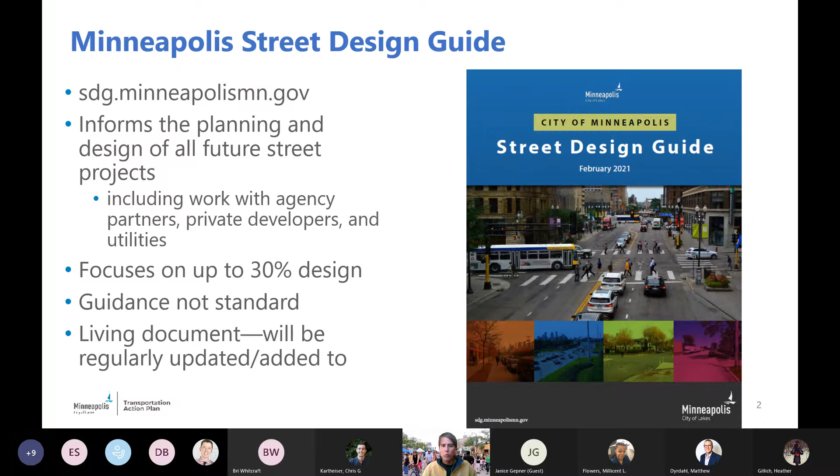I want to note, from a technical perspective, this is guidance. It's recommendations to help inform our internal technical work, but it's not standard in the same way that some other things we have to follow are standard or requirements. We will be updating this regularly going forward, and we'll be adding to it. We'll talk about this a little bit at the end as well.

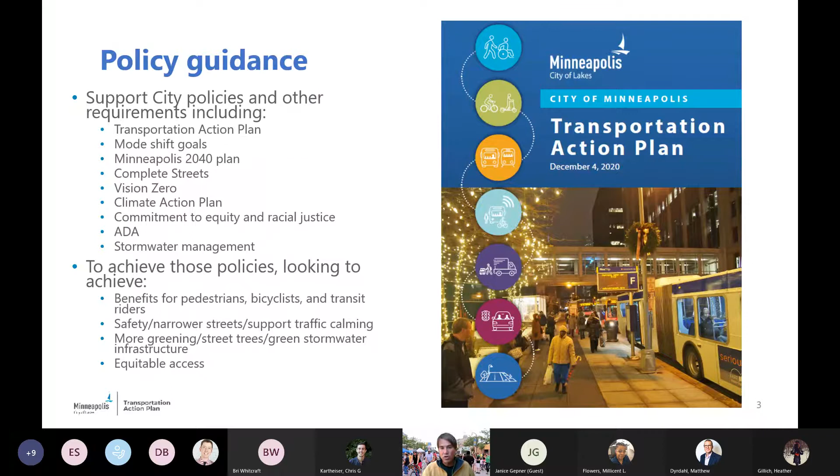This guide is really an implementation guide to help support adopted city policy. It comes out of the Transportation Action Plan directly, but a lot of other city policies help inform this. Overall, with the street design guide and these city policies, we're looking to achieve benefits for people walking, biking, and taking transit, which are clearly priorities for the city. Safety, narrower streets, traffic calming, other things related to our Vision Zero work, providing more space for greening, street trees and green stormwater infrastructure, and making sure we're providing equitable access across the city.

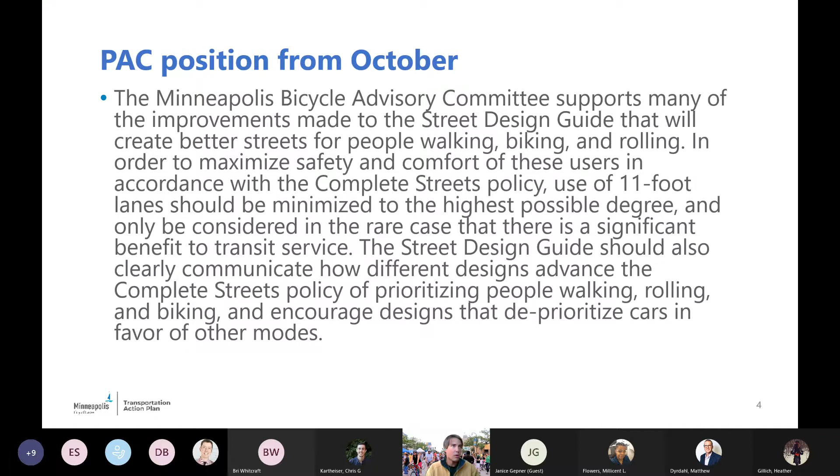So I'll try to touch on those things. We've definitely tried to reflect that within the guide, so I'll get to those details. Just wanted to reflect what you all said.

So I'm now going to stop sharing this, and I'm going to actually walk through a few things on the website itself before going through a few of the more recent changes. If you'd like, you can either just watch me, or if you prefer, you can log in yourself. Hopefully you're seeing this is not the right thing. Okay, all right, are you seeing the Street Design Guide website now? Okay, cool, so this is the homepage of the guide.

I do want to note, this is a very technical document. We tried to make this user-friendly as well, and it's really targeted for planners, engineers, or consultants, but also for members like yourself who are informing our process. So hopefully I can get you started in this, but it is quite technical.

For early users, I recommend this 'how to use the guide' starting point, which will give you some basic information about how the guide is structured, some of the things I already talked about, what its purpose is, and some places you can start. Within this, you'll see the guide is broken down into two sections. There's guidance around what we call different street types, so every street in the city is assigned a street type based on its context and functions, and from that we have guidance to help with thinking about it, especially if it were being reconstructed. We also have a lot more detailed guidance in different parts of the street, from sidewalks to intersections and different parts, and bikeways, of course. So that's the basic structure of the guide.

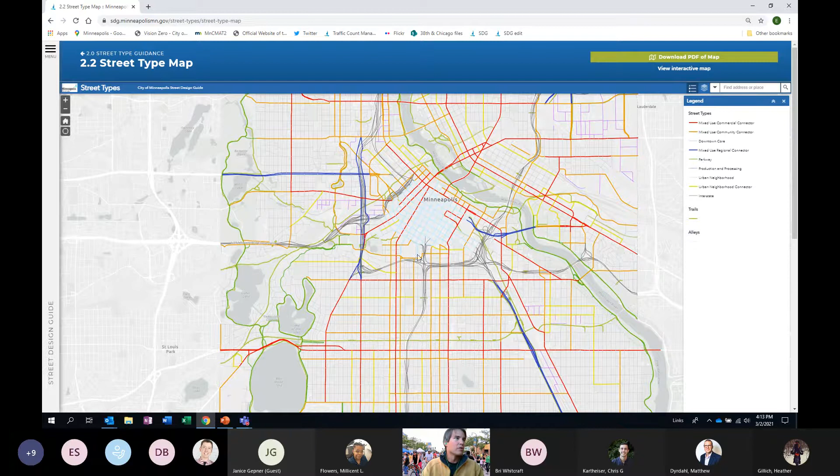And then the search feature, you can definitely search for different things. Just note that this is sort of, it's going to come up chronologically.

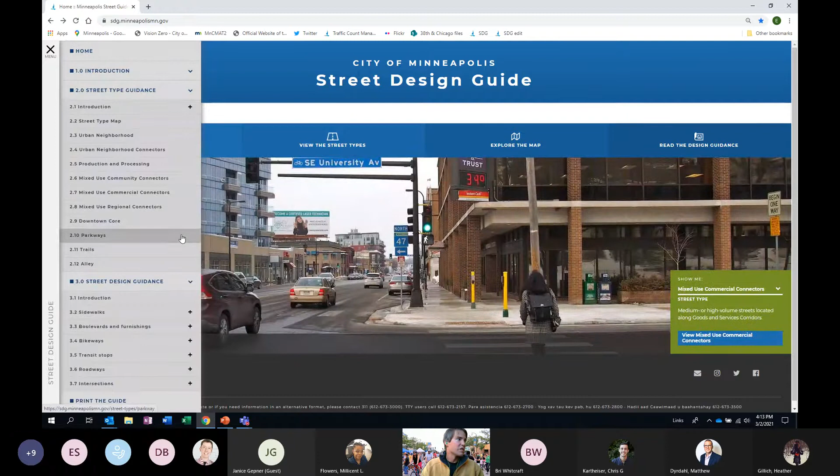So over in the menu here, you can see how different sections of the guide are broken down and kind of expand different things. You can see the bike within bikeways. We have a bunch of, you can just click on bikeways and go there, but you can also see that if you're looking for information about how do we do shared use paths or advisory bike lanes or something, you can find that in here.

And then in intersections as well. I'll dig in a little bit more on some of the bikeways details in a bit, but intersections, there's a lot here in bikeway intersection design as well. So lots to look into.

I just wanted to give you a basic introduction to the site. I'm going to actually go back to my presentation now and go through a few additional details.

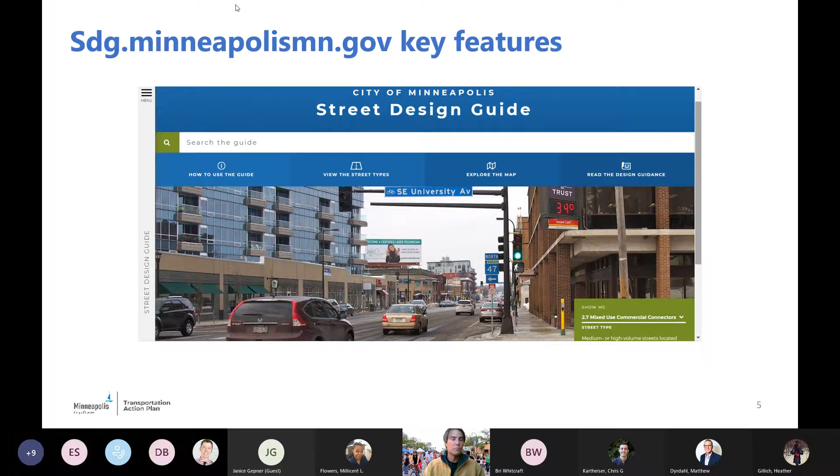Why my thing is beeping at me, a few additional details, okay, about some content highlights. I know I'm going through a lot of information. If you have a question, you can interrupt at any point, but they'll also have time at the end. So still trying to make sure I can see you in case you do something. Okay, there we go.

Okay, so some highlights. As I had talked about, some of these things are things that I shared when I presented previously in September, but I'm trying to provide additional details for you now that it's sort of finalized.

So part of the thing we're looking at within the guidance is to generally provide more flexibility so that we can maintain key city goals. One of the things we're going to talk about in a little bit, we know overall we're trying to support protected bike lanes. This is kind of a good example of how we're trying to provide more flexibility.

So at times we have not installed a protected bike lane because of some pinch points. And I think overall what we're saying with this guide, reflecting clear policy guidance and the transportation action plan, is that we need more flexibility to work out those challenging spots rather than just say, okay, we can't do a protected bike lane. And so you can kind of see how that ends up being reflected here in details.

So for example, this is a constrained cross section, and the way that we're kind of balancing that is providing flexibility to implement a two-way protected bike lane rather than just one lane in each direction. Providing flexibility in widths on the bikeway and the sidewalk, other elements, lane widths, even gutter pan widths. We're trying to maximize flexibility across the board.

Every different thing is given within the recognition of our modal priority and what we're trying to achieve. We want to get that protected bike lane in there. We want to maintain a good walkable environment. And so those things are all coming together. So just a note on some of that.

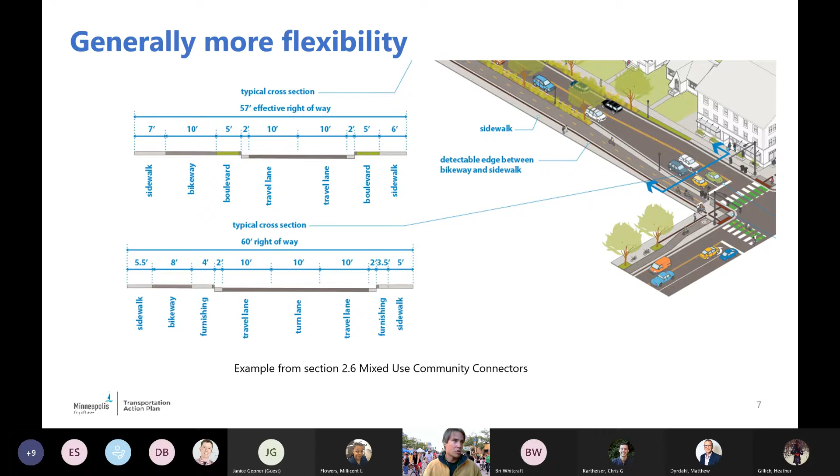We are narrowing some lane widths. There's a whole section on that. Within that, you'll see that generally 10-foot lanes are recommended. And then we do have a few places where we recognize that 11-foot lanes may be appropriate. But they are going to be the exception, not the rule, for sure.

And so within that, I think we struck a good balance that reflects that there are times an 11-foot lane where you have a lot of bus traffic or heavy semi-truck traffic, that kind of thing, may be appropriate. But it's not like every street with buses on it is going to be an 11-foot lane. No, that shouldn't be how it is.

We've also looked to narrow it. So if the bus lane is adjacent to the street, I'm sharing a little more on this because you commented on this in particular. If a bus lane is adjacent to a curb and has an adjacent gutter pan, then that should be a 10-foot lane. So that's the type of thing that we've further narrowed here.

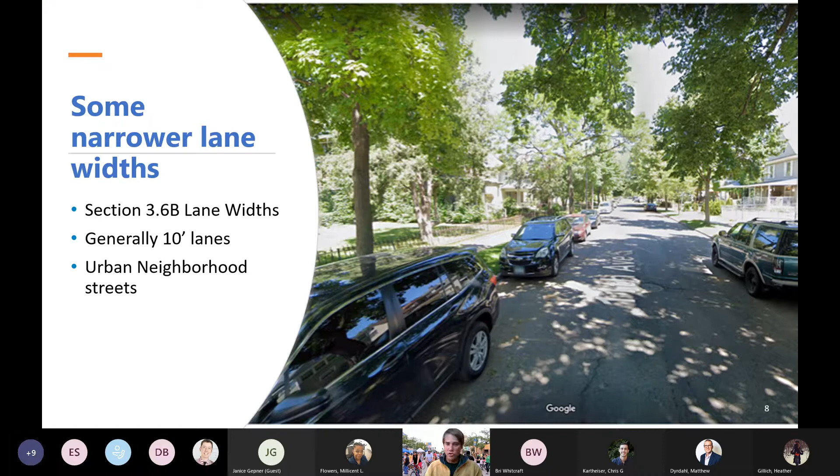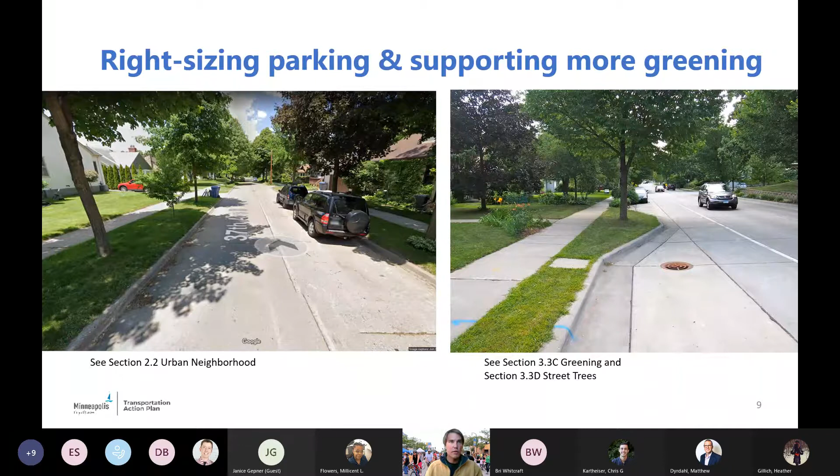We've also narrowed widths for urban neighborhood streets, these kind of quiet residential streets, a bit as well. We're directing designers to right size the amount of parking and to support more greening and other elements in the street. So you can see that there should be more streets with parking on just one side, and more streets where we have curb extensions where we're providing space for trees. So we have a bunch of guidance on this.

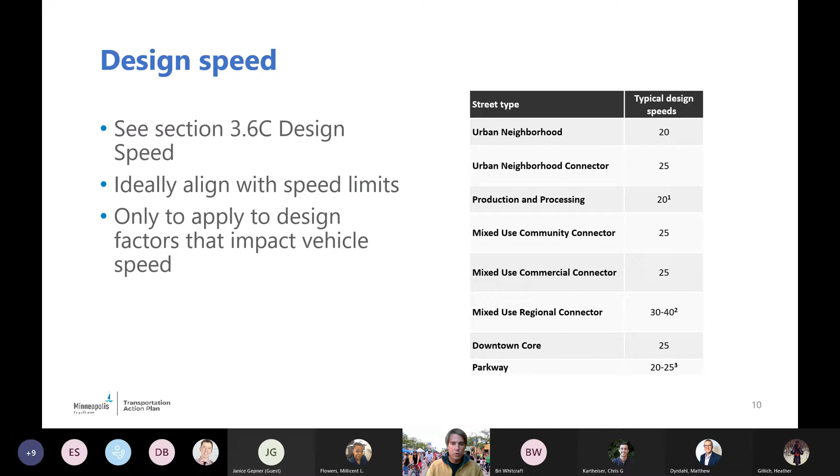We have guidance being clear about how we should be designing the street to encourage slower speeds in line with our new speed limits and to support safety. And this will also support bikeability as well as walkability.

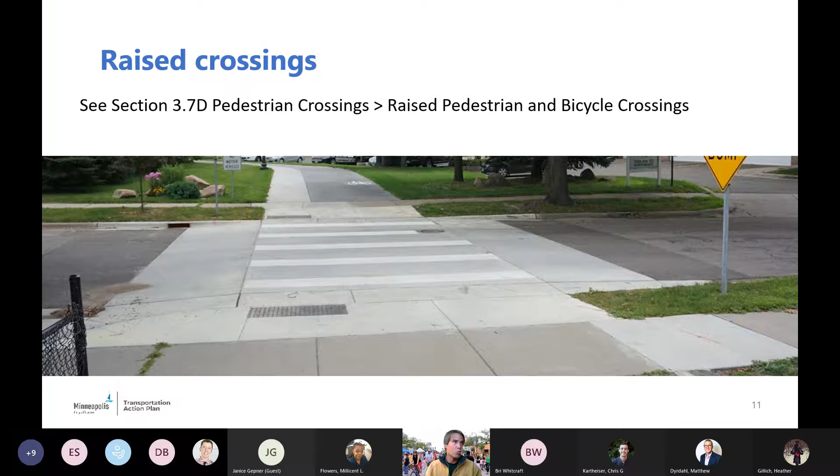I'm going to dive into some bike features now. I know I'm going through a lot of information, so I'll just plow ahead, but interrupt me along the way, and we'll leave time for questions.

For bikeways in particular, we've added some details on bikeway facility types for a street retrofit project versus a street reconstruction project.

I want to pause to recognize my colleague Luke Hansen, who couldn't be here today because he's on vacation. Luke put together all the bikeway specific sections and did tremendous work. At some point you'll meet Luke, but thank him if you see him for the street design guide bikeway work. Just wanted to give him that plug.

Reconstruction projects should implement either a shared use path or trail, sidewalk level protected bike lanes, or neighborhood greenways. We recommend against installing unprotected bike lanes on street reconstruction projects, and you see that guidance very clearly. In-street unprotected bike lanes can still be used, but more in retrofit situations where we're not moving curb lines.

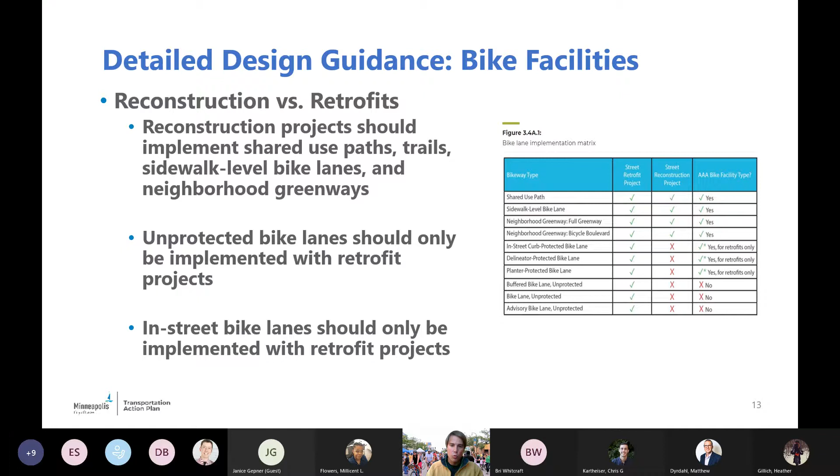We've also added guidance around intersection design treatments, which I'll show again on the website, and some things around bus stops and bikeways.

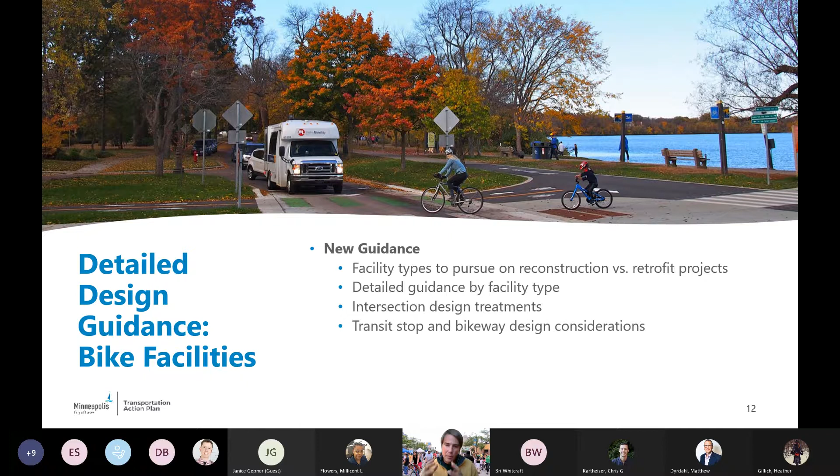We've tried to reflect a lot of the work this committee has done with staff, working with PAC and the MACOPD, the advisory committee on people with disabilities, on how we bring together biking and walking interactions, bus stops and other things when we have sidewalk level protected bike lanes. We've tried to bring all that best thinking and show it in the guide so it's clear about our recommended practice. I'll show that in a second.

Before I hop over, I wanted to note we have a lot of detail about turning vehicles and how tight curb radii should be. I know that's of interest to folks who want to see things slowed down, and we do too, so we have a lot of detail on that as well.

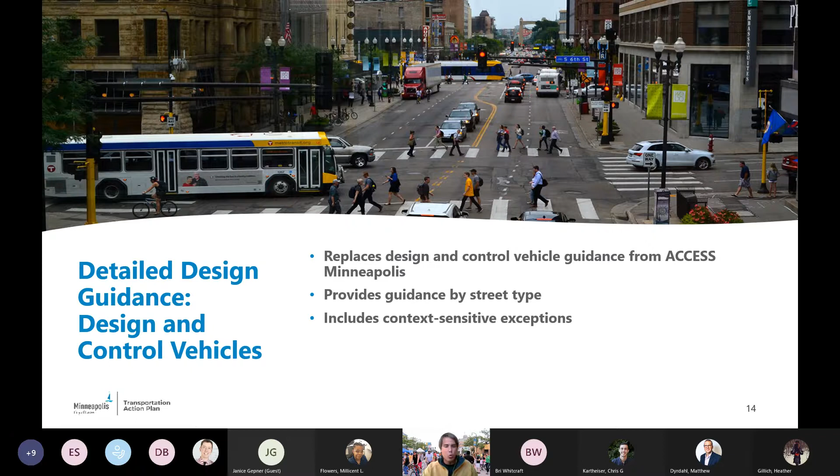I'm going to pause and go back to the website — let's see if I can do this better than last time. Okay, I'm pretty confident you're seeing the website now, and I'll highlight a couple additional things here.

If you see something that you don't think is aligned with the street design guide that comes forward with a project, hopefully we've caught that at the staff level. But this can also be a good resource to point back at us, which wouldn't be the first time. We appreciate the role you all play in holding us accountable and pushing things forward. This guide will hopefully have information that's helpful for that.

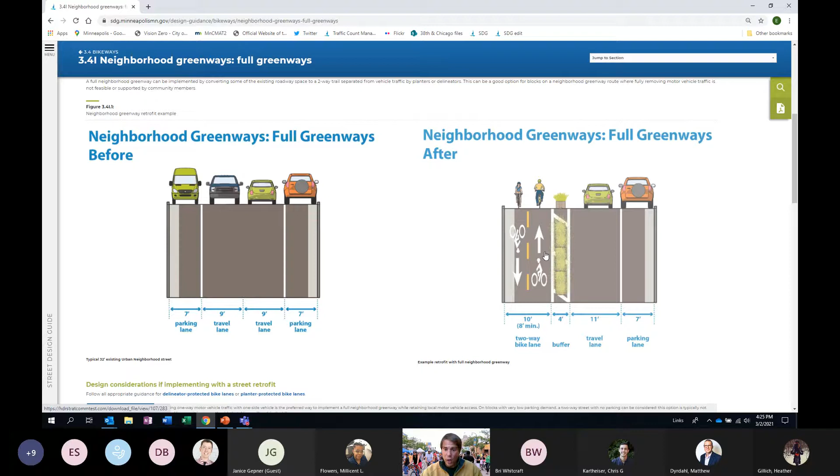We've really tried to put down details about potential implementation, both in a proactive, lower-cost way, and in a full reconstruction way. There are different ways this could look, with some limited motor vehicle access, where in a retrofit situation you take a typical local residential street—what we call an urban neighborhood street—and convert it into a one-way street, with parking on one side and a protected bike lane. This is the retrofit way to implement a neighborhood greenway, removing parking on one side to provide the space.

We have a lot of good basic guidance for that, and also for reconstructing a street like that, just a typical cross section of what that might look like. There's also the option of no adjacent motor vehicle access. We know overall that in greenway planning there's a combination block to block—some blocks might have partial access, some might be more like a bike boulevard, some might be a full greenway with no adjacent access. We tried to show what all of those could look like, with key design elements to make sure it works well for walking and biking, as well as emergency vehicle access.

This is in section 3.4i. So I'm also going to hop over to the bikeway intersections design area.

We tried to add a lot of detail guiding folks here. I think we hear a lot from this committee and others through engagement that we still have to do better at intersections with protected bike lanes. We know it's not enough to just add protection mid-block and then have a mixing zone at an intersection, where now you're sharing with a right-turning vehicle and stuck in the exhaust, feeling uncomfortable again at every intersection.

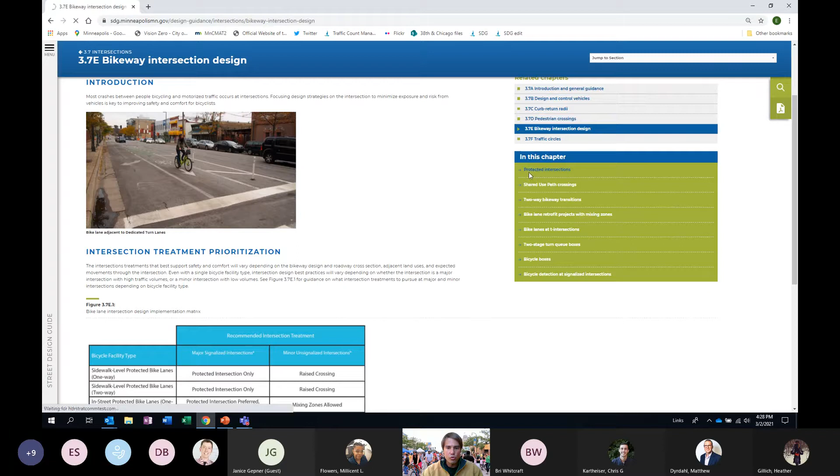So we've really looked at technical details around that, using existing recent projects that have gone through this committee, like the Whittier-Lyndale Bikeway project, where we had a lot of intentionality around how to use protected intersections in a retrofit situation. We also have examples like Hennepin Avenue downtown and 4th Street downtown, showing how to handle protected intersections in a reconstruction situation. We've tried to document a lot of that to clearly define the key elements, partly based on national research as well as our local work that you all have been helping with for many years.

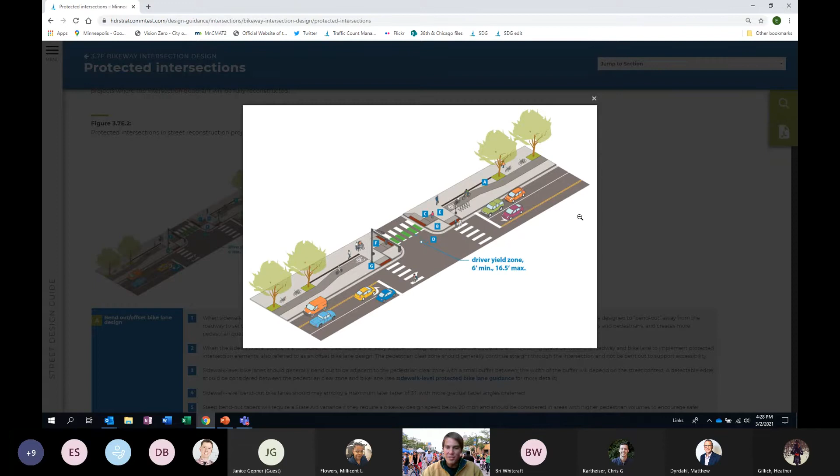We have graphics showing what this looks like and the different elements, key things like the driver yield zone, the forward queuing area for pedestrians, how different interactions work, and bend-out bike lane design. We really know the benefits of that, so we're documenting it and saying that's our standard, showing how all these things come together. You can see more of that here—this is a retrofit example, but also with a two-way design.

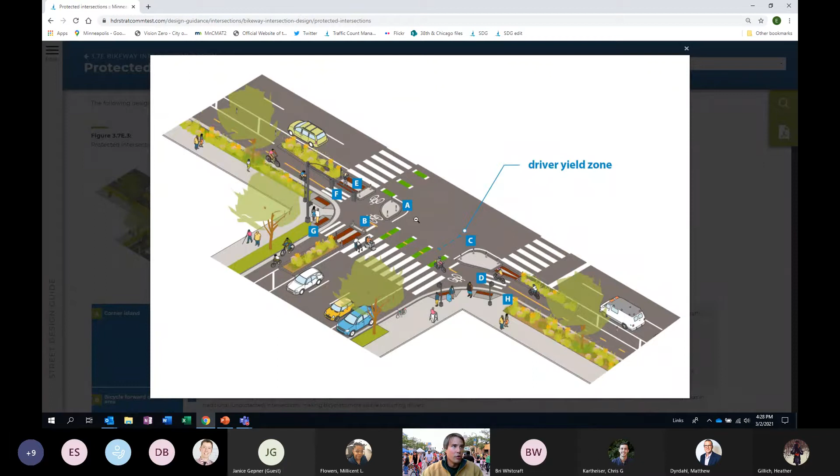Just how things come together, how you can get to these slow turn wedges, as we call them here, to really tighten up the curb radii and slow vehicle movements across the bikeway. We have information about signal phasing and all that kind of stuff to help inform this, so that we're really moving towards protected bikeways being as protected as possible at the intersection as well.

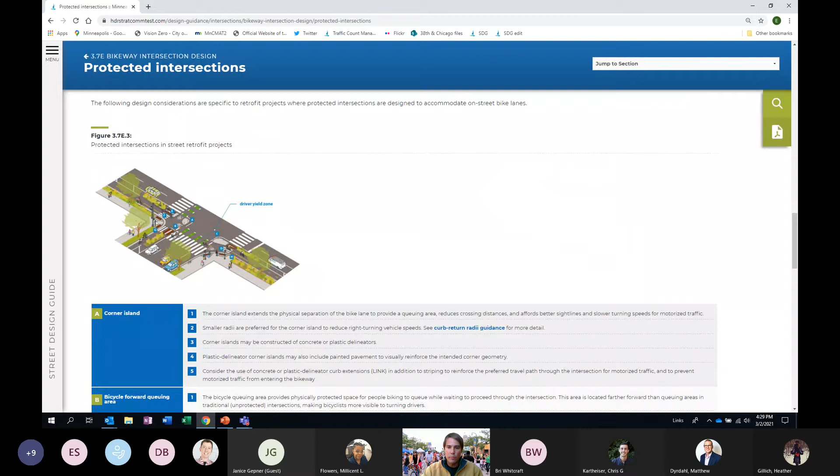It should be yielding both comfort benefits for biking, but also safety benefits for both people walking and biking. So those are just some of the things I wanted to highlight and give you a basic introduction. That's a ton of information, I realize, only really scratching the surface here. But I'm gonna now stop sharing so you can see everybody, and I'm available to answer questions.

I guess I should also talk about some steps going forward. I mentioned earlier that this is a living document, so we will be making additions to this guide as we have new information. We're actually going to be working on a few things coming up: neighborhood traffic calming procedures, more details around quick build safety improvements, and more additional details about different intersection treatments.

Those are examples of things that we'll be adding to the guide as we have them ready. We also will be updating the guide as the complete streets policy is updated at some point. We will update the guide to reflect that, and potentially in the future we'll update it if best practices evolve. So we want to keep this as a living document.

I think throughout that we'll be making sure that you all are plugged in as updates are made through the process. And then there will be times where we're trying to work something out where we're going to really engage further with the committee as well. So I just want to note that going forward.

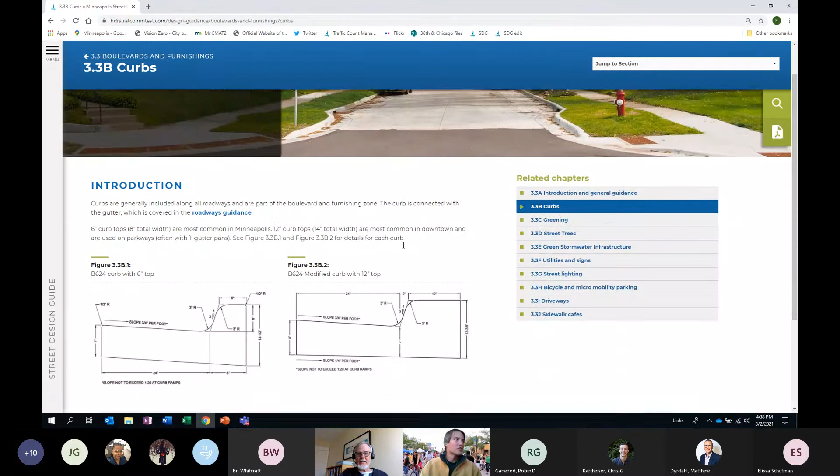We have flexibility in that space, so maybe I should pull up a picture. Let me share my screen here. Okay, so here's the curb section. It's a little hard to understand here, so I'm going to use this street a bit. Actually this isn't the greatest street, but the gutter pan is basically the seam. It's typically concrete, so if you had an asphalt road you'd see more of this edging here.

The gutter pan serves a function of moving stormwater, so that's its primary function. We don't really want, you can have people park there, but you don't really want people biking there, you don't want people driving there. Generally that standard is 2 feet wide. That's also reflected as the standard for what's called curb reaction distance by the state aid standards, it's basically that gutter. But we do recognize that designers may consider a 1 foot gutter pan in some constrained situations, and that is reflected in the guide. We push to provide more flexibility. So defining some of those terms, there's a lot of details like that in the guide.

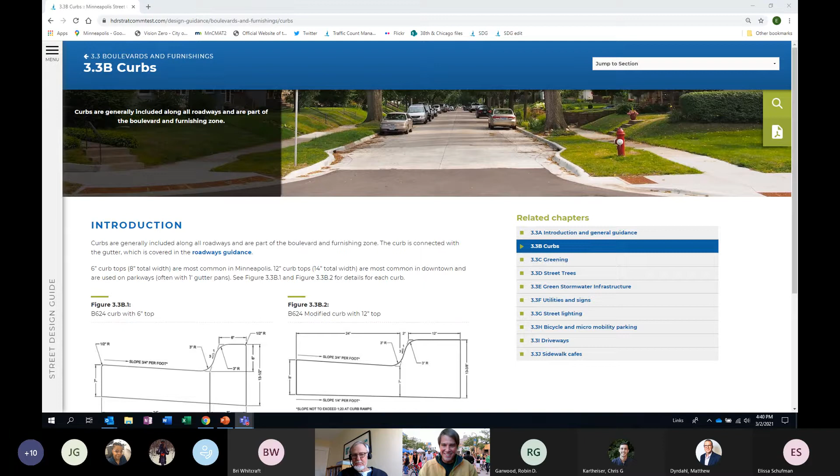Okay, that helps, great, thanks. I think Dan. Yeah, hi Dan.

So this is implementing an action in the adopted transportation action plan. It's similar to our previous Access Minneapolis street and sidewalk design guidelines, which are also implementation of the Access Minneapolis plan. Neither document is fully adopted by the city council. What we're doing with the Transportation and Public Works Committee tomorrow, as Robin mentioned, is a receive and file of a summary of the guide. But it's not formally adopted because it's at a level of implementation detail beyond the adopted policy, if that makes sense. So this will stay as a separate document from the Transportation Action Plan. It's its own website, though there's obviously a lot of connection.

And is it okay to share this publicly now? Oh yes, yep, here it is. This is being recorded. Hi everyone watching at home.

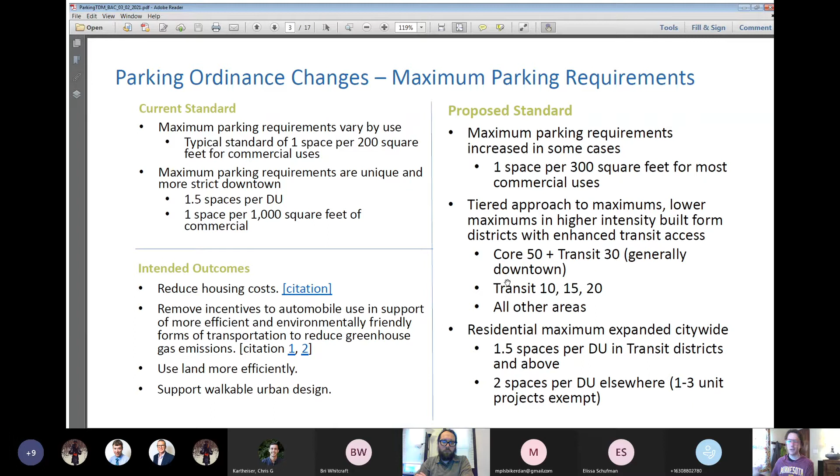We're also going to reduce the maximum parking allowed to be built on a given property. The biggest change to look out for is that we currently have a maximum for residential uses only downtown of 1.5 spaces per dwelling unit. That requirement will now be applied in more places throughout the city. And then there will be a maximum of 2 spaces per dwelling unit allowed in all areas outside of downtown and our transit-supportive locations.

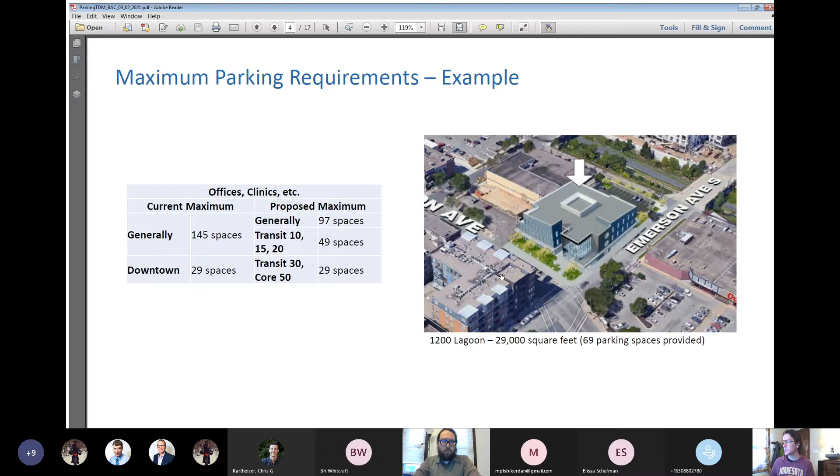To give you a sense of what that change looks like, this project is Planned Parenthood Uptown, approved a couple years ago. It's a 29,000 square foot building. They provided 69 parking spaces. The current zoning code would allow them to build 145 spaces. And now, I can't imagine seeing 145 parking spaces attached to a building this size, but it would be allowed today. So we're ratcheting that number down to a few different tiers.

We'll also be limiting surface parking throughout the city. You no longer can just have as much as you want, in addition to the maximums we're instituting. Electric vehicle charging is going to be a requirement of parking spaces in the future. At least 10% of spaces for most uses throughout the city will require EV charging stations installed, and we'll have a standard for EV readiness as well for most other spaces in development. As far as bicycle parking and facilities are concerned, we're looking at increasing some of those, some significantly.

Residential requirement today is to have 1 space for every 2 dwelling units in a development. With the exception of around the university area, there's a special zoning district that requires 1 bike parking space for every bedroom in your development. That 1 per bedroom requirement near the university is not changing. However, we are increasing the residential bike parking requirement to 1 space per 1 dwelling unit.

Currently, we have bike parking requirements for a fair number of commercial uses, but not all of them. We'll be expanding our bike parking requirements to all commercial uses and a number of other uses in the zoning code as well. So to open a business in Minneapolis, after this amendment you're more than likely going to need to supply at least 3 short-term parking spaces out front.

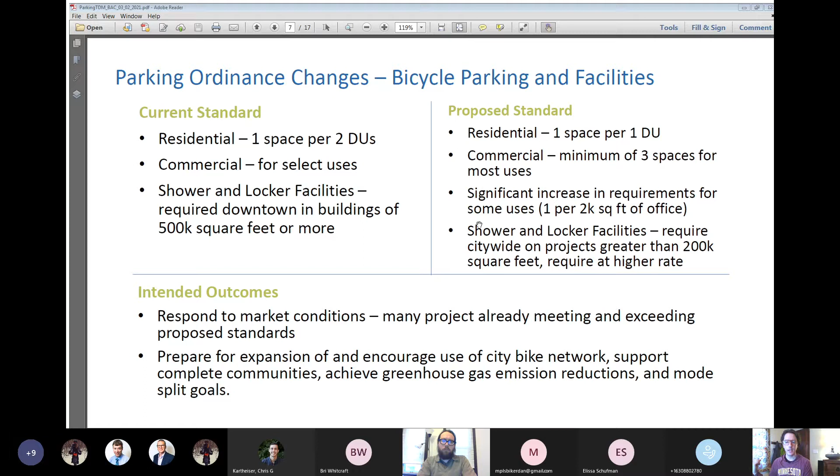The changes we're proposing for this ordinance, for a building of that size moving forward, would require 250 long-term bike parking spaces, a minimum of 8 showers, and 100 lockers. To give you a sense of what size building that is, the Gateway building under construction at Nicollet and Washington right now is over 500,000 square feet, so it would have a requirement similar to this.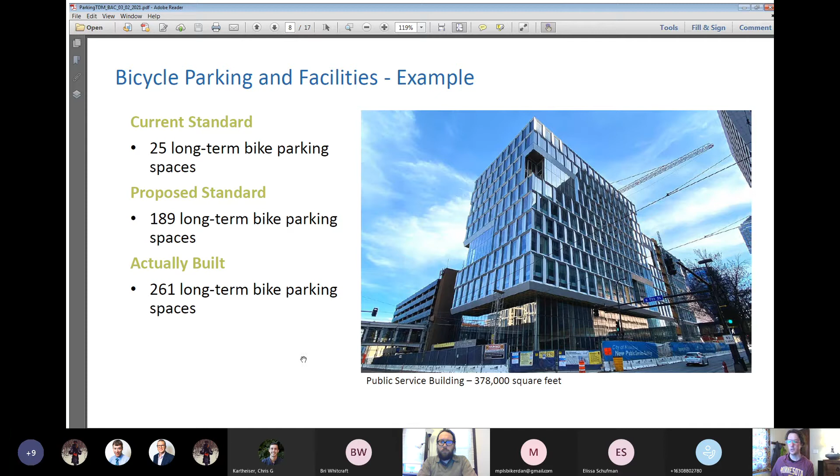Oh, I have an example in here. The city's public service building—current standard for this size building is 25 spaces. Proposed standard would be 189. The city is actually supplying 261 in the development.

We're also proposing some changes to our loading ordinance. This is in the zoning code. Loading requirements are intended to make sure we have spaces on property for delivery vehicles to get supplies to businesses and residences. We'd like to reduce some of the loading requirements for lower intensity uses, especially uses like a grocery store, where we want them to locate in more places throughout the city—some places that are more challenging to locate because of our current loading requirements. We're also intending to increase flexibility in those requirements by allowing developments to negotiate their loading requirements through our travel demand management ordinance.

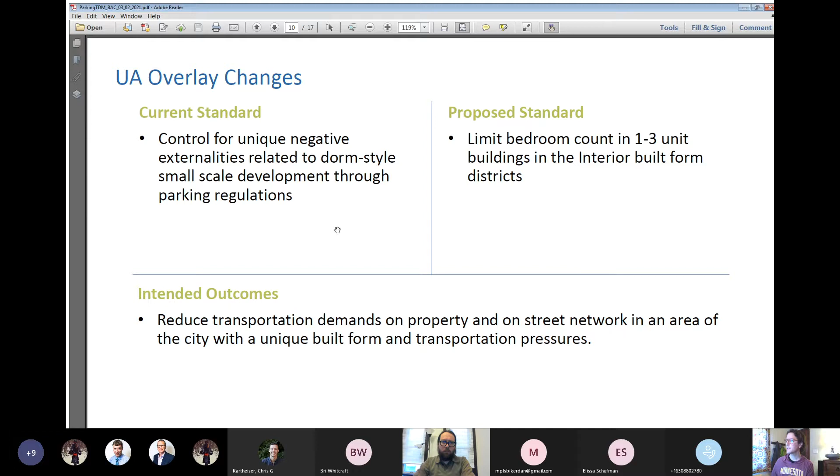This is kind of a niche issue, I don't think we need to cover it here. The UA overlay has some unique parking requirements that, since they're going away, we'll address with some changes there.

The other major change here is in the travel demand management section. Currently, our travel demand management ordinance is not very specific, and it applies to very few developments by ordinance—only non-residential development over 100,000 square feet. We do have public works staff and planning staff who call for some discretionary TDMs for other developments, but it's not a consistent process. So we're looking to standardize that process and shift our focus away from traffic studies in our travel demand management program, focusing more on achieving the desired outcome of shifting our mode split and reducing greenhouse gas emissions.

Moving forward, we're going to apply this requirement to all projects with more than 50 dwelling units or greater than 25,000 square feet. There will be a tiered system where smaller projects can comply without creating an engineering report. I'm sorry if this is kind of inside baseball, but I think it's important to understand some of these details before we talk about what it looks like on the ground.

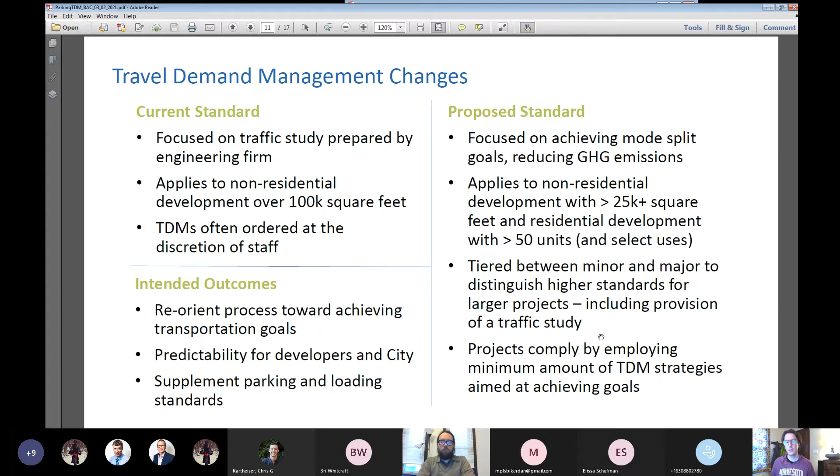You're going to comply with our ordinance by providing any number of items from a list. This list is not yet comprehensive; we are considering adding more things and changing the points you're awarded. The intent is to ask developers to do items that will have the most direct impact on achieving greenhouse gas emission reductions and getting people out of their cars.

So the top two things we're trying to incentivize here are developments that promise and deliver a transit fare subsidy, and developments that provide zero parking. If developments aren't able to deliver that, they're going to have to do a higher number of other elements from this list to comply with our ordinance.

Those other things are providing limited parking, doing pedestrian realm improvements, increasing the number of showers, lockers, and long-term bicycle storage beyond what's required otherwise in the ordinance. We're hoping to really encourage curbside demand solution improvements—on-street pickup and drop off for some uses, and allowing for deliveries in some cases curbside. Valet parking is always something that's been encouraged in our TDM plans as well for some of our busier uses, in particular downtown.

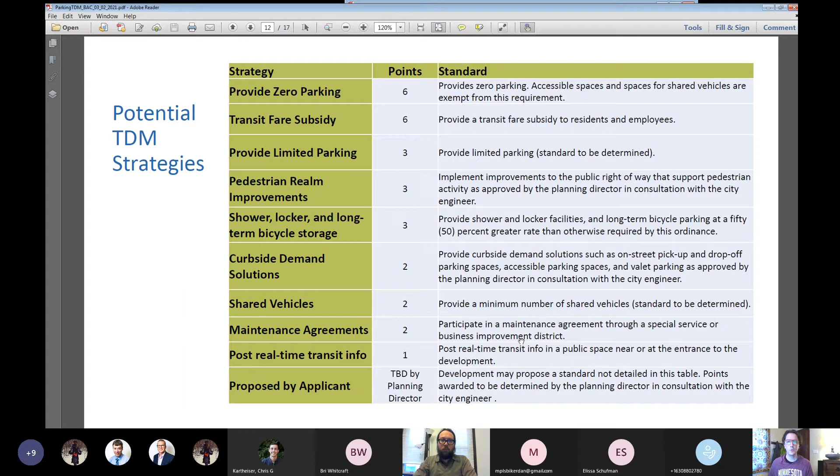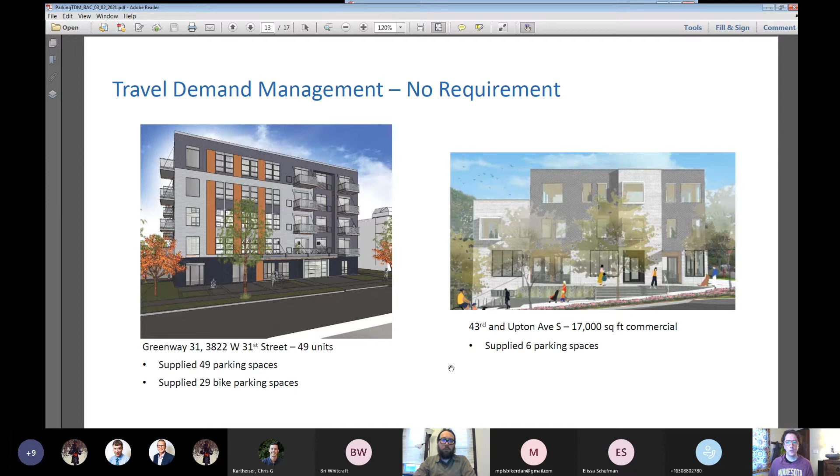To give you a sense of the scale of the projects we're talking about that will be required to go through this process, these two projects were approved within the last year or two and do not meet our thresholds for triggering these requirements, since they're relatively small.

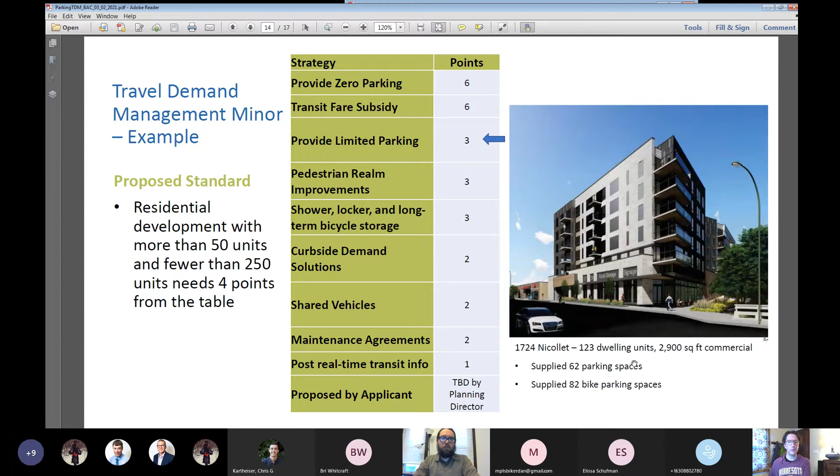I'm not going to run through all these examples, but to give you a sense, this is a project on Nicollet near I-94 that supplied 62 parking spaces and 82 bike parking spaces. It's not clear how they would have complied with our proposed ordinance, so they would have had to do something above and beyond what they already proposed to do.

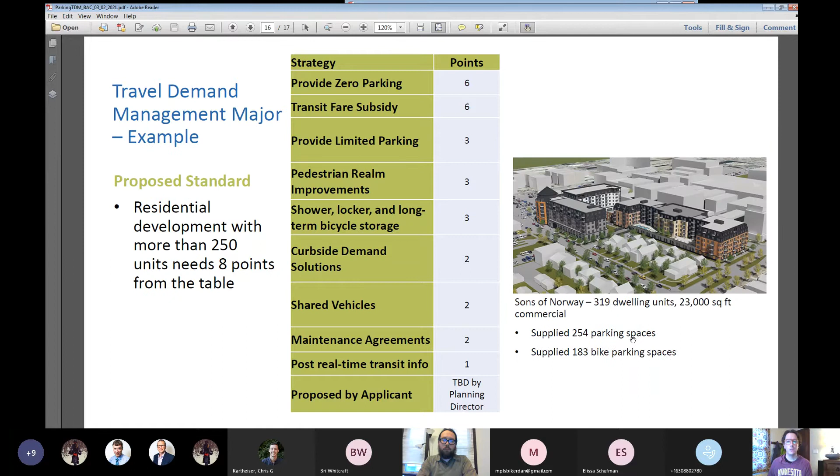With that, I think I will just pause and ask if there are any questions or anything in particular folks would like to discuss.